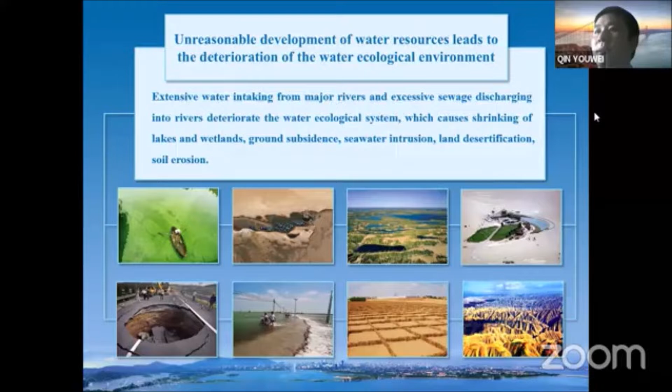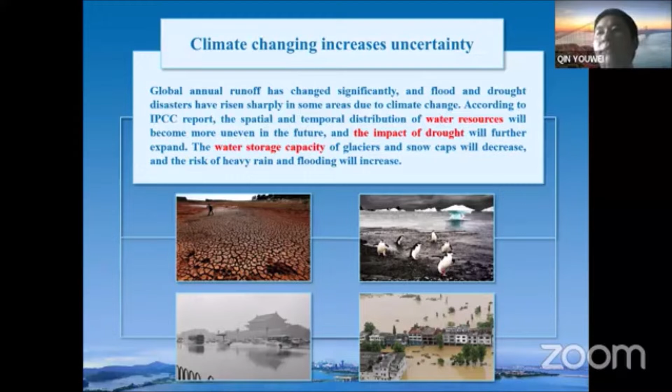This has also become a global issue. A lot of international institutions pay much attention to this problem. For example, the Asian Development Bank aims to build a water security framework for Asia-Pacific countries.

Now I will talk about some of the water safety situations in China and what we did. Mainly, the first thing is too much water - China has suffered from flood control safety issues, because China has a very complex water system.

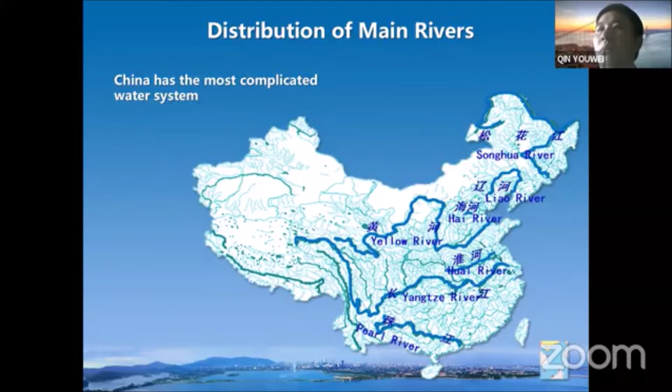China has made a huge achievement in the last 10 years. The most important thing we did is flood control and disaster reduction. To achieve this, along the main stream of the rivers, we have basically formed a flood control and disaster reduction approach, and the important river sections now have the ability to prevent the largest flood since 1949.

As you can see from the picture below, what we did is build up dams and build up monitoring and early warning systems. These are the engineering solutions - for example, we build dams and embankments, which help prevent floods. Another important thing is we also built monitoring systems.

For example, we also built some non-engineering solutions. One is the monitoring and early warning system and the flood scheduling system. Another thing is we also developed some flood storage areas. By doing this, we have built up a lot of flood control systems in the main rivers.

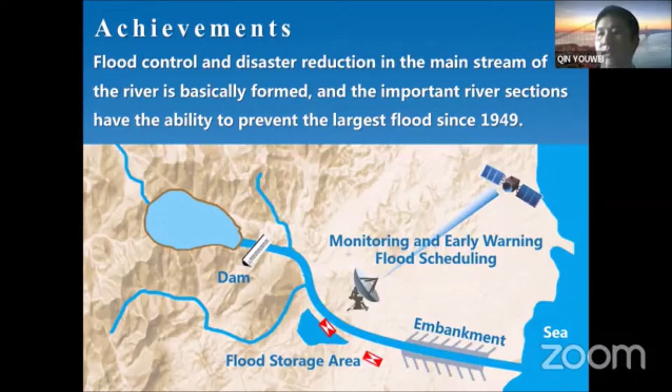Another achievement is that we have built a large number of water conservancy projects. For example, the left panel here is the Xiaolangdi Reservoir in the Yellow River. Its function is that it can control flooding during the rainy season, and moreover, it guarantees water supply during the low flow and dry season.

The right panel here is the Three Gorges project in the Yangtze River. Its main functions are flood control, electricity production, navigation, and drought alleviation. By building up these projects, we have saved a lot of flood damage before. I know that in Pakistan there are a lot of projects happening in the upper Indus River, and that might also be helpful to prevent floods and save water for the drought season.

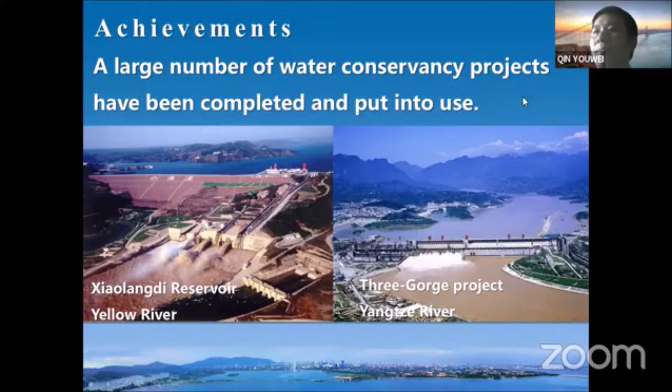There are also some problems left. The first problem is that the flood control ability for medium and small rivers still has to be improved. For example, flash floods and debris flow disasters occur frequently in these small rivers. The flash flood doesn't have much forecasting period, and it is also difficult to monitor. So the government has devoted a lot of effort to develop new methods and technologies to avoid these problems.

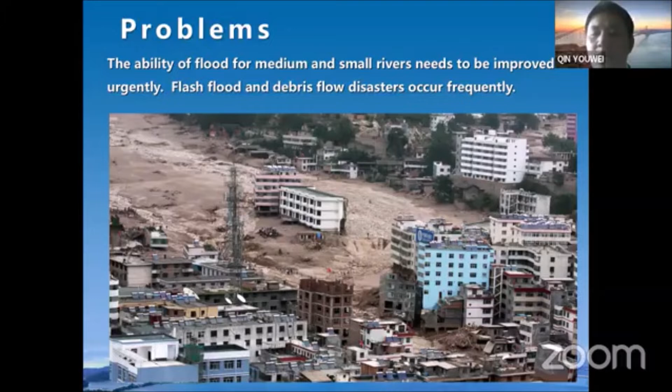Another problem is that waterlogging becomes a problem in big cities. Because of urbanization, the rainfall runoff process has been changed a lot, so these characteristics have been changed.

This is also a problem that happened in Pakistan. In Islamabad, in September, when I stayed there, we had a very heavy rain, and in 20 minutes there was around 10 centimeters depth of water on the road. But this kind of water disappeared very soon, maybe after 1 hour, when the rain stops it will disappear. But what happens is this water in the urban area can cause problems.

Another topic I would like to talk about is water supply security. Before we were dealing with too much water, and now we deal with too little water. In China we have built up a very good water supply network system, which utilizes various water sources such as surface water and groundwater, with various water supply facilities for storage, diversion, lifting, and regulating. The annual water supply exceeds 600 billion cubic meters.

The penetration rate of tap water is above 97%, and the guarantee rate of water supply is above 95%. Domestic water is almost 100% satisfied.

The plot here shows the Jiangdu Water Conservancy project. As you may know, this is part of the South to North Water Diversion, and the Jiangdu Water Conservancy project acts as the source of the eastern route of the South to North Water Diversion. The water comes from the Yangtze River, and through the South to North Water Diversion, we transfer the water to the north area that has water shortages. By doing this, we can guarantee domestic water to almost 100%.

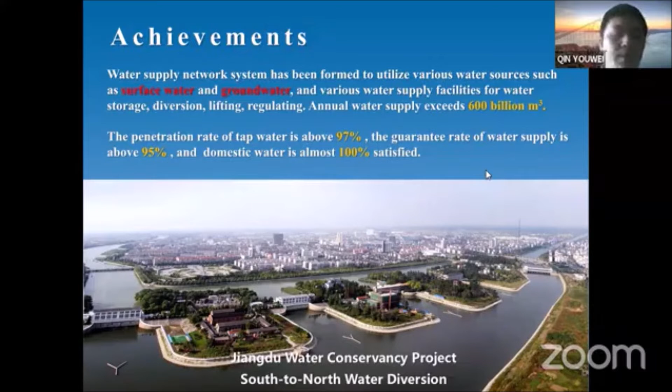The second achievement here, as we can see from this plot, shows the total water consumption by this line, with around 4 kinds of water consumption. The agricultural water consumption is this line, which is the most important part, taking the most significant role. The second is industrial water, and the next lines are domestic water and economic water. As we can see from this plot, the industrial water consumption has increased significantly.

It is now around 144.7 billion cubic meters, accounting for 24% of water consumption around the year 2010. Before, it only accounted for around 10%. We've seen a huge development and expansion of industry, and water usage has increased. But one thing we cannot ignore is agricultural irrigation. Although it has been more stable in recent years, it still takes the most of this water, around 370 billion cubic meters as of 2010.

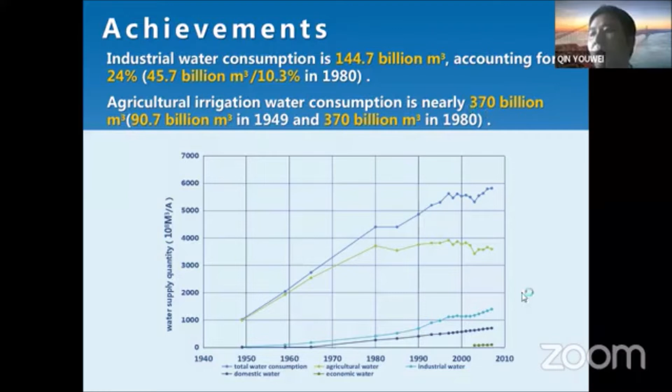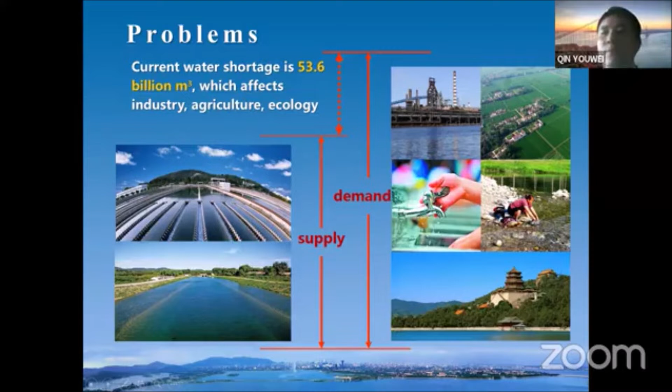There are some problems occurring in China around water supply. The current water shortage is around 53.6 billion cubic meters, which affects industry, agriculture, and ecology. Although we have many water transfer systems, we need to focus more on the demand side, because we can take solutions to save water. On the other hand, we can also increase the ability of water supply by improving water transfer systems or using more groundwater.

There is another problem that happened in China in the last maybe 10 years, which is water pollution. Here are two plots: one is water pollution in the Songhua River, with chemical pollutants, and another is ecological pollution in Taihu Lake, showing algae blooms.

In recent years, China has taken a very positive approach to dealing with this. One way is the river chief system, where every river and pool has a chief in charge of it. Nowadays, the water quality in rivers, oceans, and lakes has improved a lot.

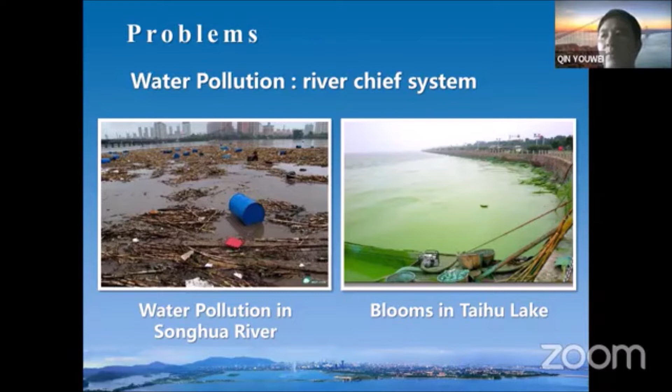Now I will make a conclusion of what I presented here. The water crisis facing Pakistan and China are strikingly similar. In the last 20 years, we worked on flood control, building reservoirs and embankments along main rivers, and dealing with urban flooding. Another focus is water safety, which affects agriculture, industry, and daily life. The main issue we need to address is water usage efficiency. If we can solve this problem, we can save a lot of water.

Okay, so this is the presentation I did today. Thank you for having me here today.

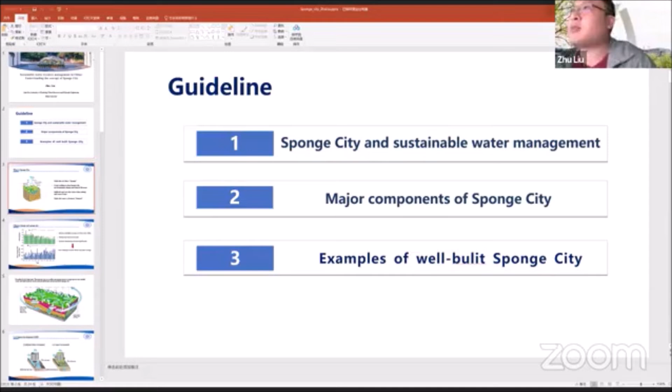Thank you, Dr. Qin and Dr. Abbas, for your excellent presentations. My name is Zhu Liu from Hohai University, and it's my honor to be here to give a presentation to all of you. Today my topic is sustainable water resource management in China, understanding the concept of sponge cities. Thank you also to the Pakistan Research Center for Community with a Shared Future for this invitation. My presentation's guidelines are as follows: firstly, I will talk about sponge cities and sustainable water management in China; secondly, the major components of a sponge city; and lastly, I will give some well-built examples of sponge cities. Let me make it full screen.

So firstly, what is a sponge city? If you look at the left panel, it gives you an expectation - it's like a sponge. So we are building a city on top of a sponge. It's not a real sponge, but we are assuming that underground portion is like a sponge part.

So when the rainfall comes, it can directly infiltrate into the underground, and then when it becomes drier later, we can reuse the water we stored in the underground portions. But on top of the ground, we can actually build some green infrastructures or wetlands, grass, trees, etc. So the sponge city should have great resilience when facing environmental change and natural disasters, and we're making the water cycle more natural.

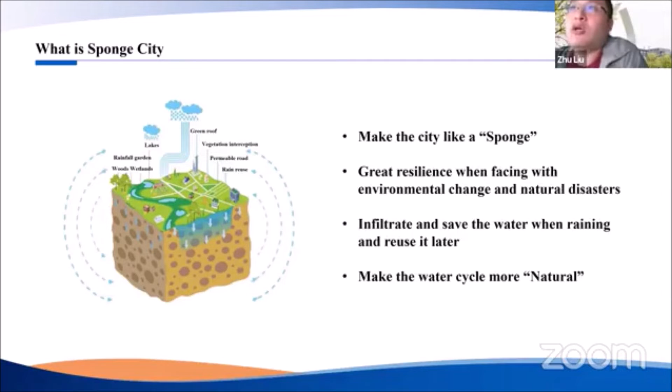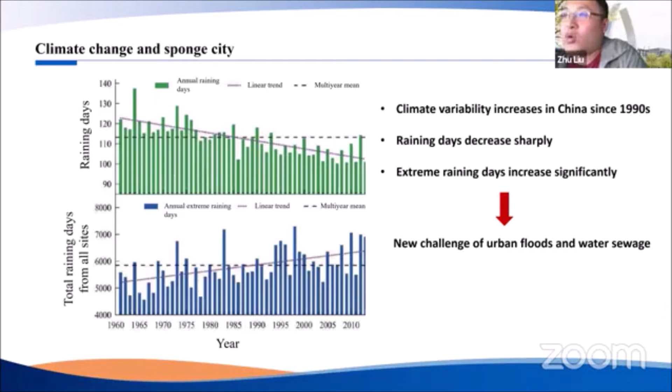However, comparatively, the extreme raining days increased significantly. This means that the rainfall becomes more concentrated - it's more like it comes in a very short period of time. So this brings new challenges of urban floods and water sewage systems.

President Xi of China says that the priority way is to utilize the natural power to keep and use the rainfall water and build natural stored, natural infiltrated, natural purified sponge cities. So if you look at the figures here, when raining, we want the sponge city to have a function to absorb water, save water, purify water, and infiltrate water. But when needed, we can release water and use water.

So it means it will have a very high curve number, so that the flow can only be transported away from the urban sewage system like pipes itself, but from the ground, it's like almost all becomes flow. So this means it's not very environmentally friendly.

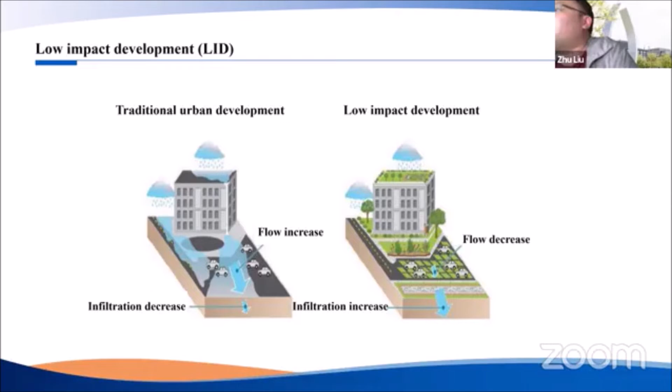So the benefits of a sponge city: it's a collection of water during rainy day seasons and extreme precipitation events, save water and reutilize water resources. It can also improve city ecological systems.

So next, I'm going to talk about the major components of a sponge city. Actually, when making a sponge city, there are very complex steps and many components. But since today we only have 8 to 10 minutes for presentation, I summarize 3 major components and steps together. So when you want to build a sponge city, you need these 3 facilities: the first one is water collection facilities, the second one is water storage facilities, and the last one is water usage facilities. Now I will talk about them one by one.

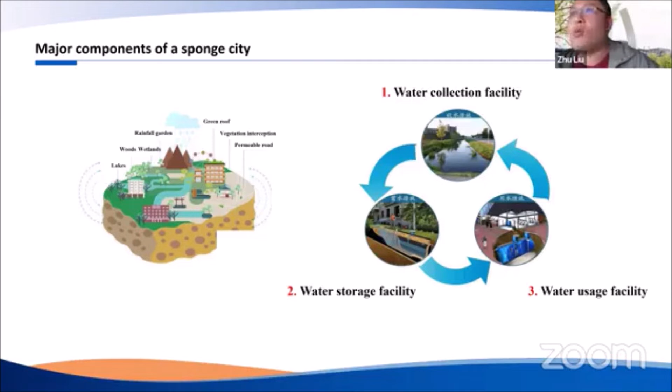It has a vegetation layer, and below it, a coverage layer. Below the coverage layer, it has a soil layer. The coverage layer is where you put some bricks or gravels, the bigger stones, so that it can keep the soils below it from flushing away during the rain.

And below the soil layer is the sand layer and gravel layer again. Inside the gravel layer on the bottom, we usually have a perforated pipe. So when the rain comes, it can gradually infiltrate into this underground portion.

At excessive rain, if it's a small rain, it's all absorbed by the sand, soil, and gravel. But if it's a bigger rain or extreme rainfall, after it's saturated, the extra rain will be transported away through the perforated pipe.

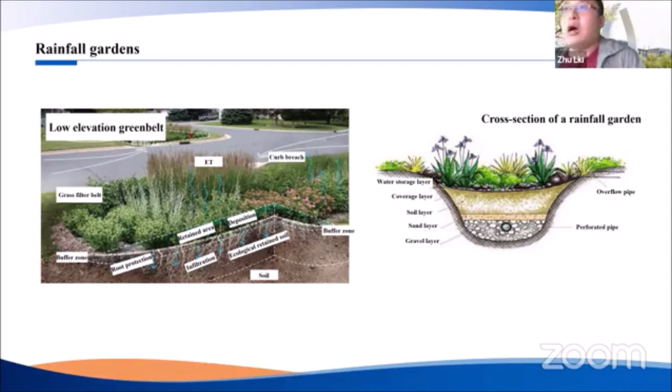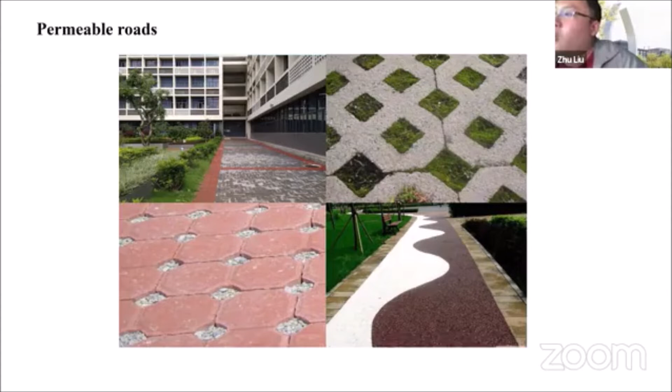Green roof is another type of water collection facility. We usually make it have a slope. When we put soils and vegetation on top of the roof, it can clean the environment by absorbing carbon dioxide and releasing oxygen. It also makes the scenery more beautiful. When collecting rainwater, it also purifies the water. After being purified through the soils, the water is transported through the slopes and collected into a pipe or other water transport canals to other places.

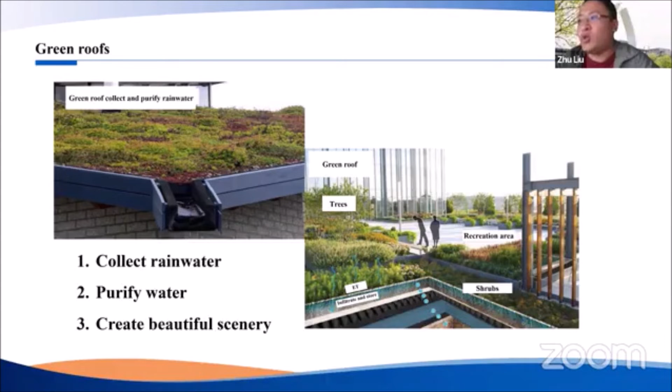If you make green roofs on top of buildings, you can also create recreation areas. This is a great way to save space, especially for industrial regions or very densely populated areas. The second type is water storage facilities.

Soak up the rain. Rain barrels capture water from the roof and hold it for later use, such as on lawns, gardens, or indoor plants. It's a great way to conserve water, and it's free water for use in your landscape.

Man-made wetlands - we know natural wetlands, but humans can also make wetlands. It's actually a pond in a wild environment setting. Man-made wetlands can serve as storage ponds for rain gardens, grass ditches, and deposit impurity contents, and can also create a wetland scenery. This is a great place to store water.

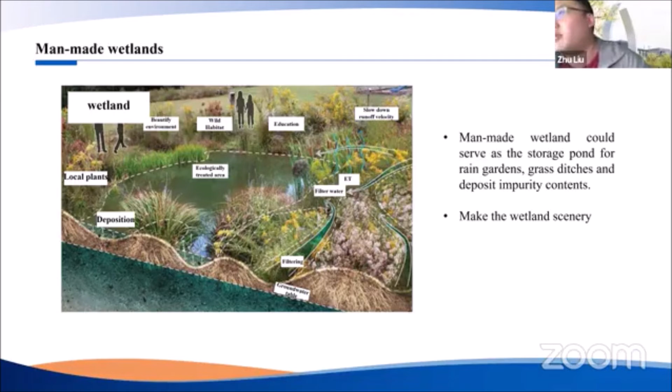Usually when people make this type of man-made wetland, they build a park around it in China. With the wetland scenery, along with grass, trees, and flowers next to it, it becomes a great place for barbecue, hiking, and family gathering.

Underground tanks are also one type of water storage facility. They are especially useful for densely populated areas where we cannot build too many wetlands, or where rain barrels are not enough to save the water. So you can use underground tanks instead.

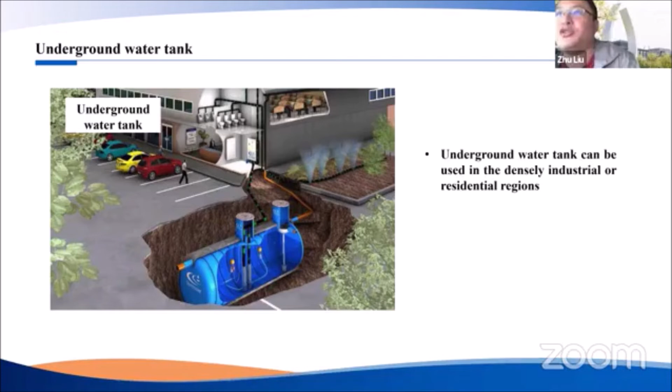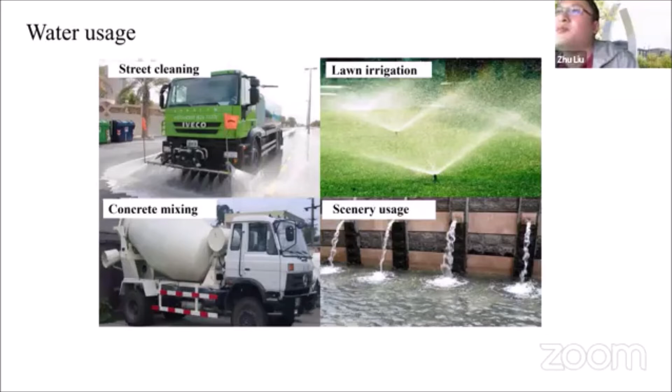So the water can also be used for car washing and toilet flushing. This can save a lot of water.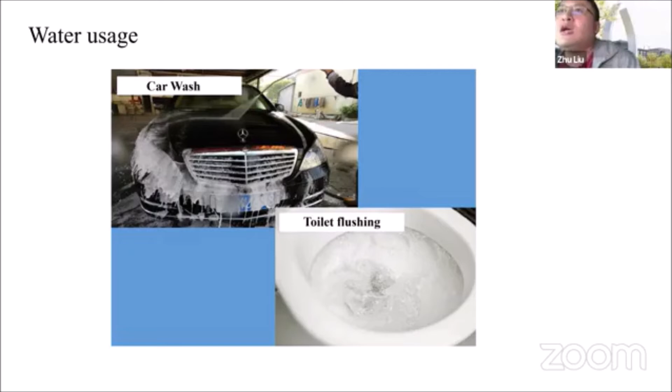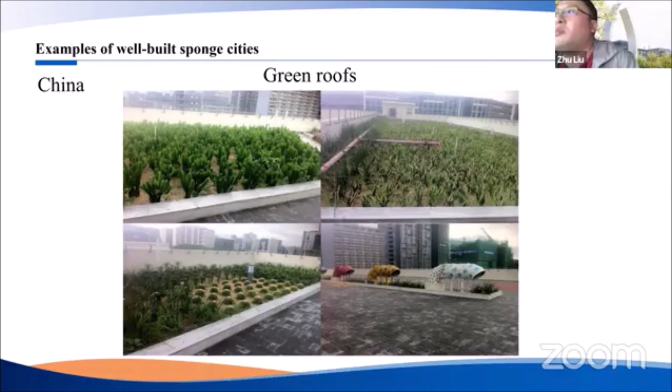Lastly, I'm going to give examples of some well-built sponge cities in China and other parts of the world. This is one example of green roofs in China, at Shenzhen University. Shenzhen is a very developed place in the southern part of China. You can see these buildings grow different types of vegetation, and if you look at the bricks, they're all permeable bricks.

This is another example of rain barrels for residential areas. They collect rainfall on top of the roof, and then use pipes to connect it to the rain barrels on the ground to keep the water.

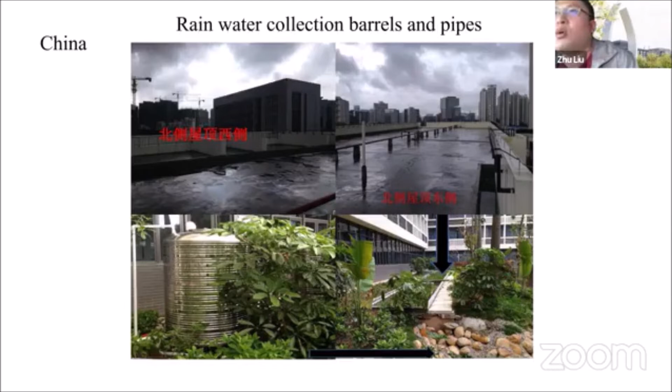So this is all I have for today. Because time is limited, I just gave a very brief introduction about sponge city constructions. Thanks very much for your attention. If you have further questions, this is my email address at Hohai University, please feel free to contact me. Thank you very much.

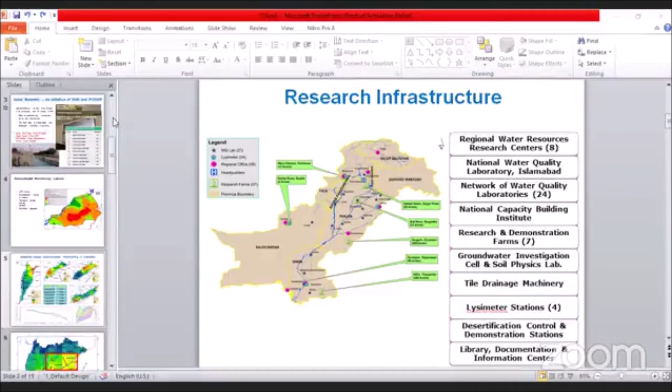Ladies and gentlemen, my name is Faakhar Reza. I'm director in Pakistan Council of Research in Water Resources. For introduction, it has its head office in Islamabad and 8 regional offices, which are water resources research centers in big cities of Pakistan. We have 24 national network of water quality laboratories, and then an institute for capacity building in Islamabad, and research and demonstration farms to demonstrate the technologies we develop and the research we conduct.

We demonstrate at our research and demonstration farms. We have a groundwater investigation cell and soil physics lab in our head office in Islamabad, tile drainage equipment in our Tandojam office, and 4 lysimeter stations where we conduct research on crop water requirements for different ecological zones of Pakistan. Other than that, we have a desertification control and demonstration station near Bahawalpur, called Dingarh, in the Thal desert. And then we have a library and documentation of information on our website as well.

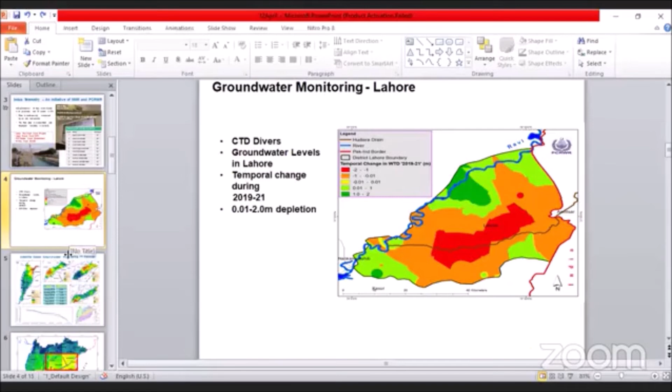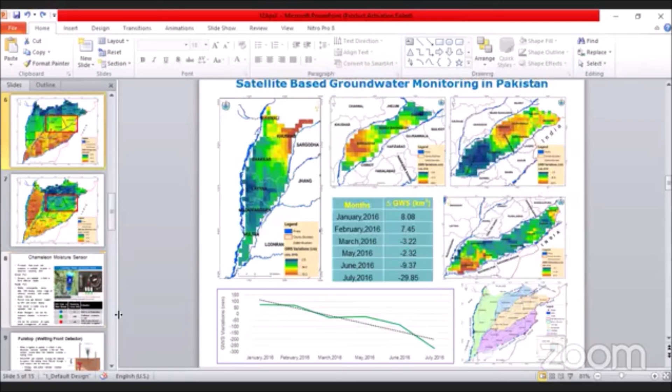For example, between 2003 and 2009 in this highlighted area, we can see how much groundwater storage has decreased. Where it shows blue, I will explain in the next slide that it is gaining some recharge during flooding events. So here you see that when we had a flood in 2010, we had some recharge and our groundwater storage increased in this area.

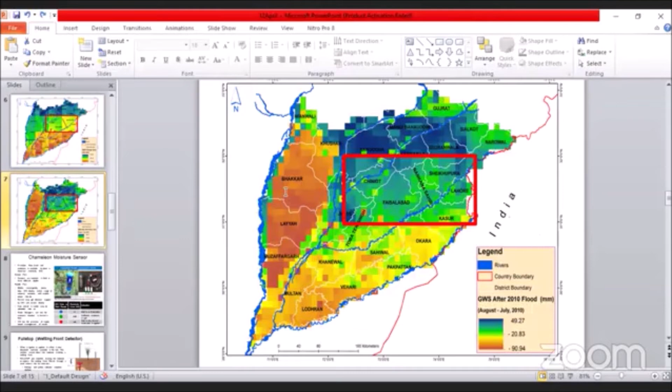Then, regarding irrigation scheduling in the agriculture sector, we have introduced state-of-the-art equipment like this chameleon sensor. It was developed in Australia, and we have partnered with them for its introduction in our country. The principle of this moisture sensor is based on measuring available water through electrical resistivity. It has 3 probes, as you can see in this right side photo, and these sensors are installed at different depths so we can see what soil moisture is available at what depth.

On the right side you can see light emitting diodes in different colors. When it measures that the soil is too dry and the farmer must irrigate, it pops up a red light, and blue means it has sufficient soil moisture.

And the farmers then decide when to irrigate and how much to irrigate. I will come to that next.

This is another instrument called FullStop. It detects how the wetting front is being created. These two sensors are installed at different depths, as you can see in this photo. The first one indicates when the soil is partially saturated, and it has a different color.

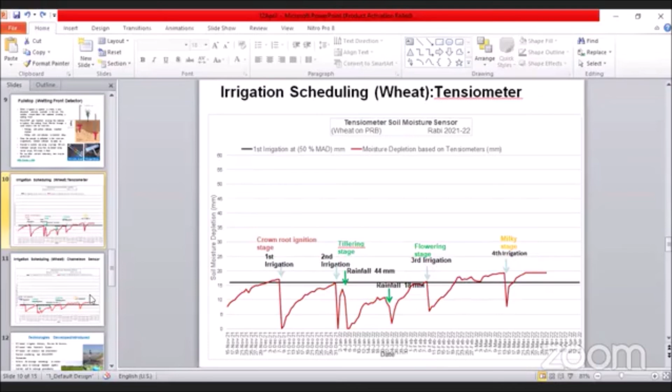And when we compare this trend with the chameleon sensor, which is a little more sensitive, we can see that the trend is similar in both cases.

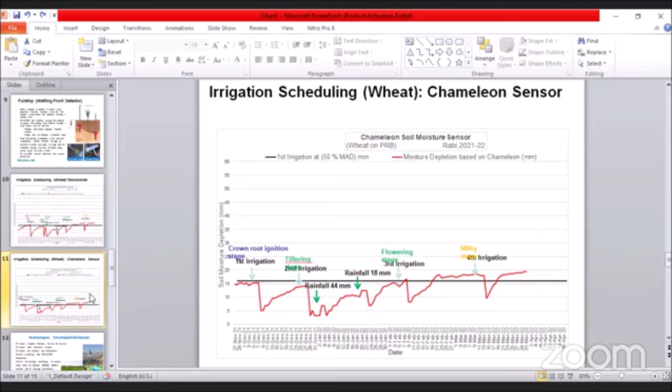The technologies we have developed or introduced so far include satellite-based groundwater monitoring. Based on this data, we also do ICT-based irrigation advisory to the farmers, showing how much evapotranspiration is in their area and what is the crop coefficient KC in their area. Our algorithm calculates how much irrigation they need to manage in the coming week.

So we send this through SMS to the farmers so they can act accordingly. I have already mentioned this telemetry system, soil moisture tool, chameleon, and FullStop, tensiometer.

And then we have this drainage technology to reclaim our farmlands. In areas where we have waterlogging issues, we can drain the water through this tile drainage technology for land reclamation.

Leaky dams to recharge depleted aquifers, like in Balochistan, are another technology we have introduced. Inverted wells to recharge groundwater are prototyped in our offices in Lahore and Islamabad, and now this is being replicated in the ICT area, as I've already explained. It's quite a useful technology to replenish our depleting aquifers.

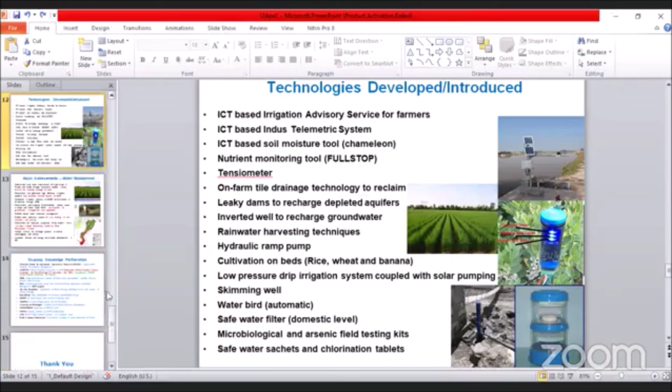Then we have developed some safe water sachets for chlorination and tablets for our water tanks at the domestic and household level.

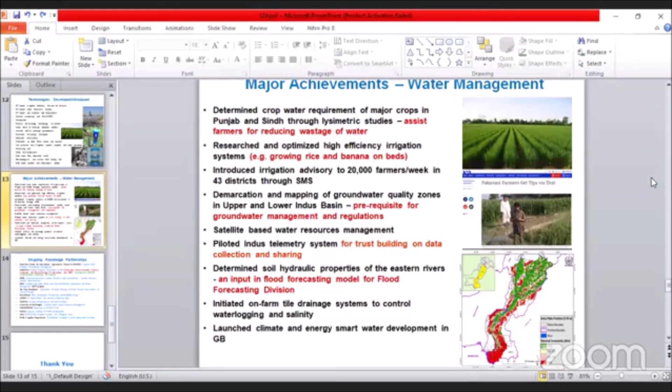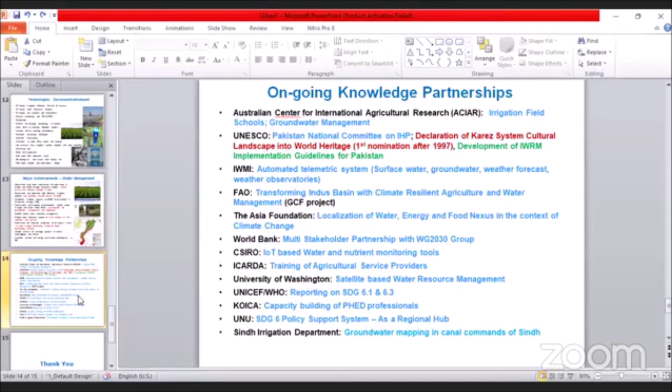Some major achievements, I think I have already mentioned most of them. I just want to mention here that we have ongoing knowledge partnerships with some internationally renowned organizations like ACIAR, UNESCO, IWMI, FAO, Asia Foundation, and World Bank, and we have done a lot of work with them. Our research work is also communicated and shared with stakeholders throughout the country, because we are a federal government organization, and we share our produced knowledge with provincial stakeholders and decision makers for better taking the research to field level. Thank you very much.

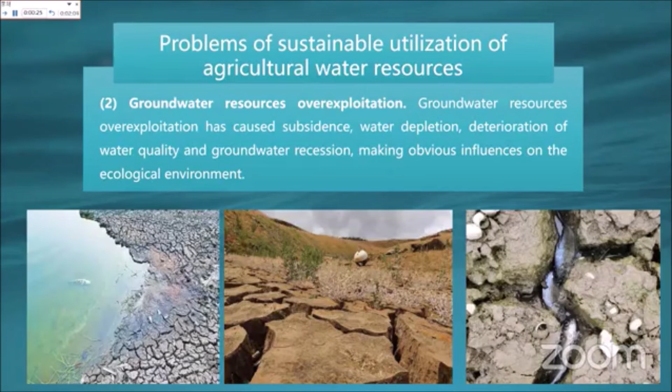The third problem is the low utilization efficiency of agricultural water. Due to the lack of effective agricultural irrigation systems and effective management and allocation, many farmland irrigations are not satisfactory, and the waste of agricultural water resources is very serious.

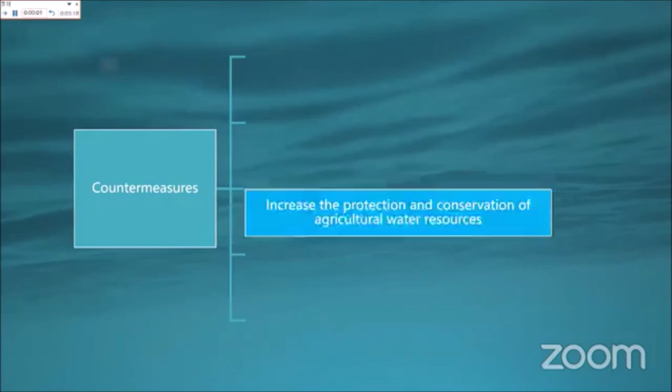The second section I want to report is about the measures for agricultural water resources. Generally, many effective measures have been taken to improve governance ability in recent years. For example, improving water resource utilization through agricultural water means, wastewater treatment technology, water-saving awareness, and new countryside construction. Next I will report on these measures from several aspects.

The first measure is to increase the protection and conservation of agricultural water resources. The second is to improve water quality for ecology and the environment. The third is to optimize rural treatment and recovery technology. The fourth is to strengthen efficient water saving and improve the utilization rate of water resources. The last one is to improve water-saving awareness and legal systems.

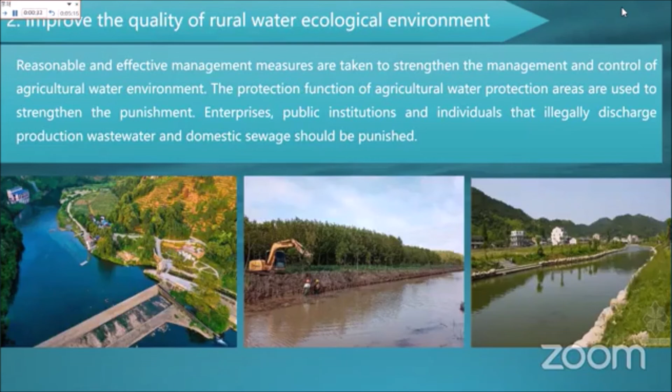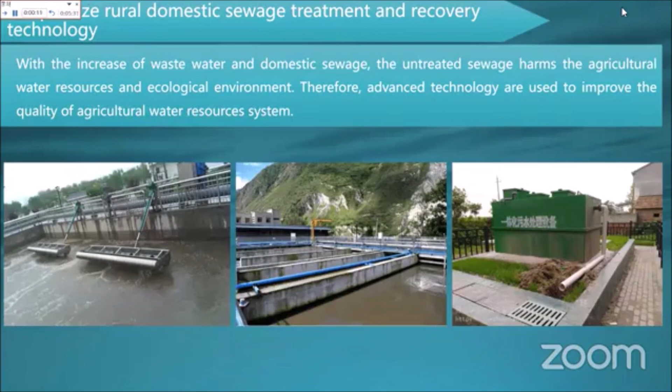The third measure is to pay attention to wastewater treatment, which can help improve the quality of agricultural water resource systems.

The last measure is to promote the development of modern agriculture. Traditional methods may be limited and lead to waste of water. So in recent years, many modern technologies have been used to improve the application of information and intelligent technologies, such as big data, artificial intelligence, and machine learning. These advanced technologies are becoming more and more popular in agricultural water resources.

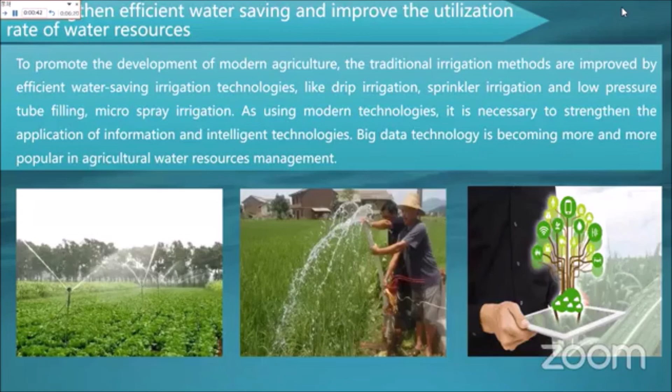The last point is to improve the water-saving awareness of all people. As we know, the whole world is composed of many people. If people don't take part in their roles, the world may not become the ideal one. So it's very important that the water-saving awareness of all people helps us conserve our limited water. Besides, water resource management rules, laws, regulations, and policies are also improved to help all people take part in water resource protection.

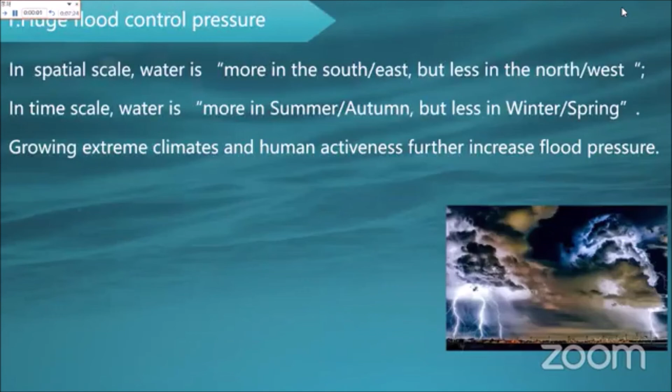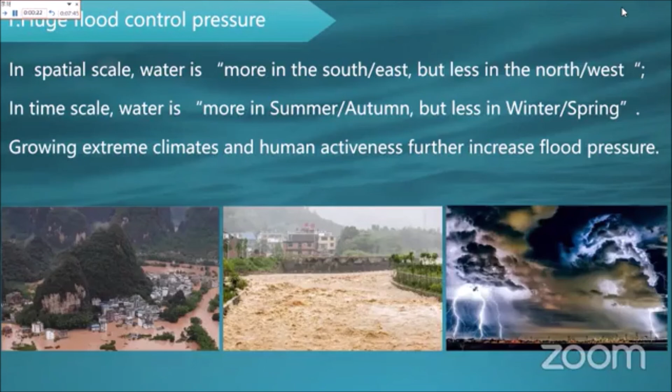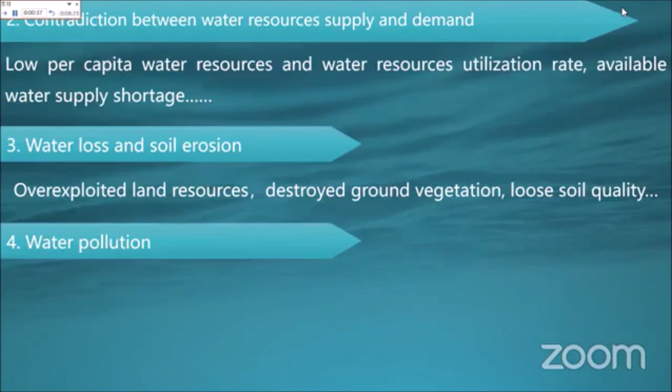By far, I want to report the current situation of water resources. In China, water is more in the south and east, but less in the north and west. On a time scale, water is more in summer and autumn, but less in winter and spring. Besides, growing extreme climates and human activities also increase flood pressures, so there are serious contradictions between water supply and water demand, because of the low water resource utilization rate and limited available water supply shortage. The third problem is water loss and soil erosion, due to many factors from both human activities and natural environments.

The fourth huge water problem is pollution, due to industry wastewater and agriculture drainage. So next, I want to report the water resource reform policies. There are many policies; next, I will give a typical water policy. It's about the most stringent water resource management system.

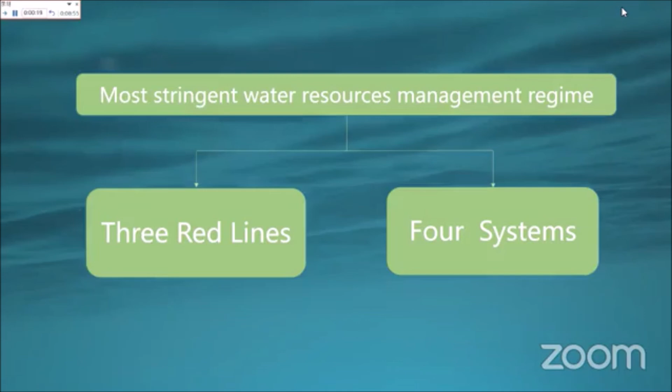It is composed of two aspects: one is the 3 red lines and 4 systems. For the three red lines: the first is the red line for the development and utilization of water resources, and China's total water consumption is limited to 700 billion cubic meters by 2030. The second red line is for controlling water use efficiency; by 2030, water utilization efficiency is close to the world advanced level, while the water consumption for industry added value is less than 40 cubic meters. The third red line is for limited pollution intake in water function areas. There are also some indexes to be raised.

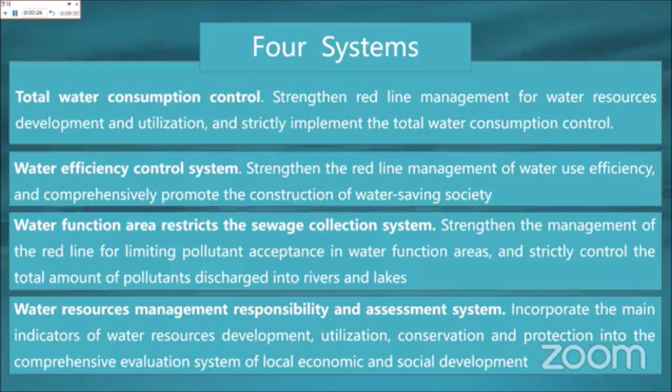So here is a brief conclusion. As we know, the water resources in time and space are not very well distributed, which may lead to contradictions between water and many factors like economy and population. The second point is that growing human activities and climate changes have also made serious impacts on the water resource systems, and social and economic development over the world.

In the past decades, China has made greater efforts and achieved success in addressing serious water resource problems by using many effective engineering and non-engineering measures. So these useful measures may provide reference for Pakistan's agriculture and water policy reforms. So that's all, thanks.